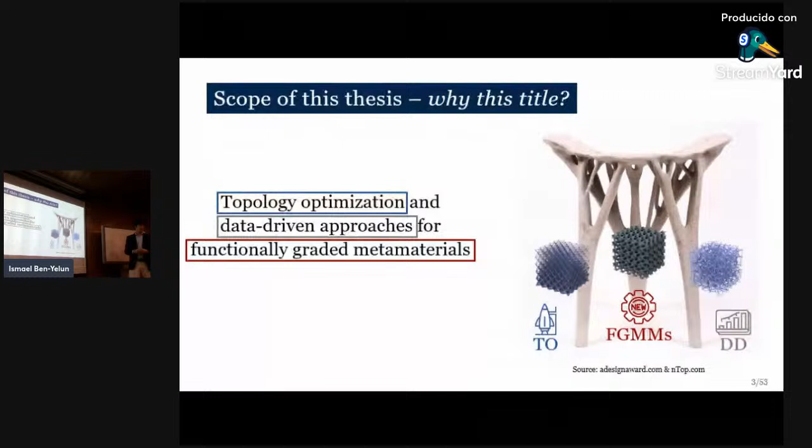So in this context, the metamaterials began, and they are defined as microarchitected materials that can exhibit unique properties compared to the bulk materials that they are made of. On top of that, they can be functionally graded, which means that their equivalent properties can vary across the domain.

Now let's give a quick example of each of the topics. So let's say that for topology optimization we have this domain omega with these boundary conditions. If we run a minimum compliance optimization algorithm, this is the cantilever beam that we would achieve.

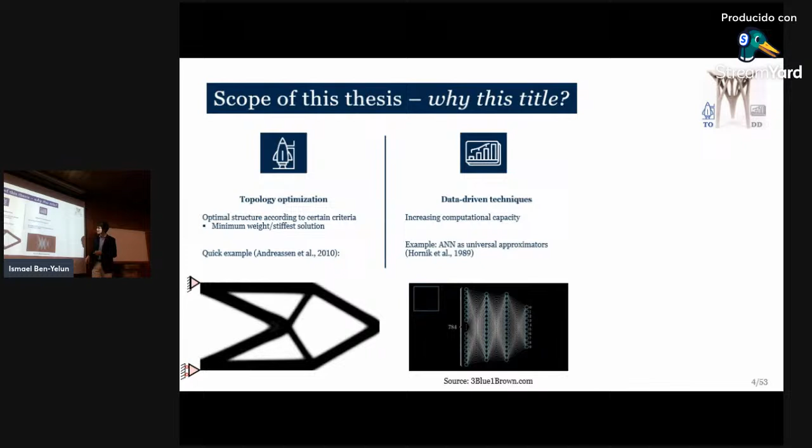In terms of data-driven techniques, an example that I like is the image recognition by artificial neural networks. This model can learn from data, in this case handwritten digits, and can identify this image over here as a nine, replicating the phenomena that is happening in our eye.

And lastly, as I was saying that metamaterials can exhibit unique properties, one of those properties is the ability of being auxetic, which means having a negative Poisson's ratio.

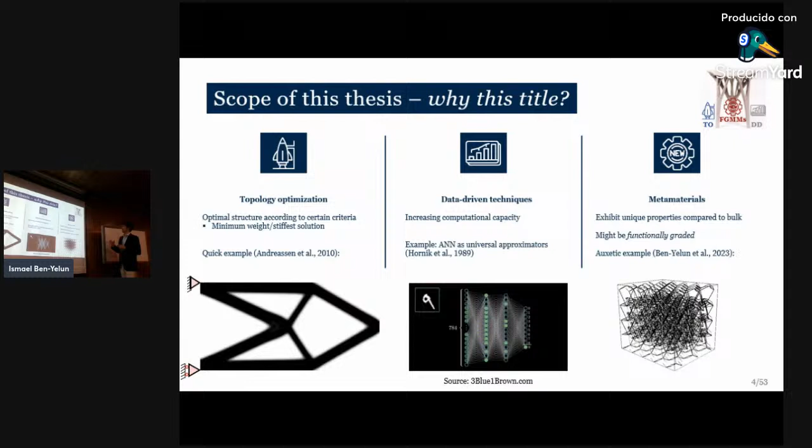Now let's review in a little bit more detail each of the topics and the state of the art, starting with topology optimization.

As a mathematical optimization problem, we will minimize an objective function, for instance the compliance of a structure, subject to some constraints: the linearized equilibrium equation, and other constraints like volume in compliance minimization problems.

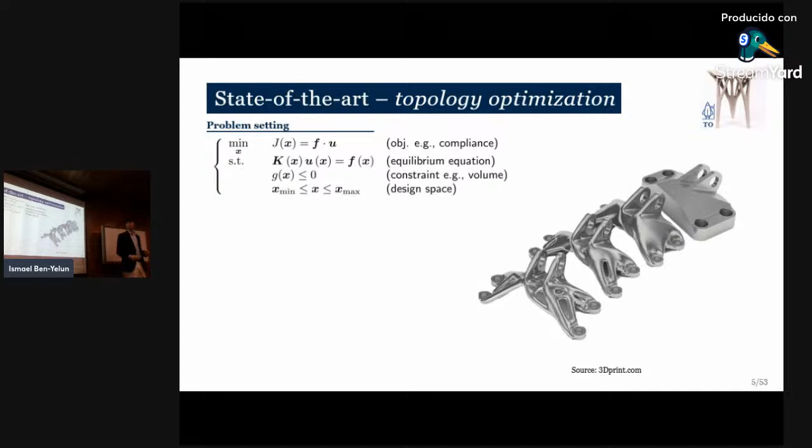We will typically consider linear elastic isotropic materials, and on top of that, penalization techniques, meaning assuming an exponential law relating the density of an element and its stiffness. This is assumed in the Solid Isotropic Material with Penalization scheme, SIMP, one of the most famous topology optimization algorithms, which is gradient-based.

But there are other techniques, like ESO, that don't require the computation of sensitivities, and they are simpler in that sense. This idea of being evolutionary or hard-kill will be exploited in the second part of this defense.

Sigmund and Maute highlighted in a review paper ten years ago some of the challenges topology optimization has to face. For instance, the ability to deal with multi-scale problems, and hence computationally expensive problems.

And also the ability to deal with complex boundary conditions, mixing force and displacement impositions.

But on top of that, we identified that these algorithms are typically targeted at global requirements, for instance the global compliance of a structure. And we are missing the opportunity of targeting local objectives, implementing functionally graded metamaterials.

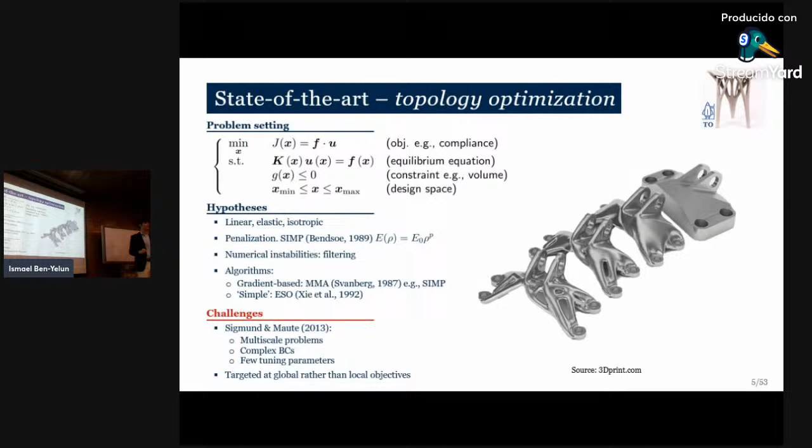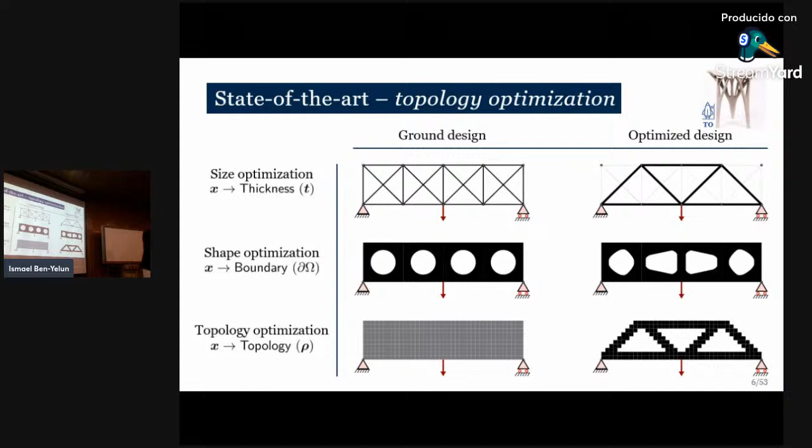By the way, I'm continuously talking about topology optimization, but let's frame it within structural optimization. So basically we have size optimization, in which the thickness of the members of our structure is the design space. In shape optimization, the boundary of that domain is going to be our optimization variable. And lastly, in topology optimization, every element of my finite element discretized mesh is going to be an optimization variable.

Now let's move to the data-driven techniques. As I was mentioning, there are plenty of data available in order to build our surrogate models that can bypass expensive evaluations. In our case, the data from which these models will learn is going to come from either simulation or experiments.

So far, when we are solving a part or a component in our computer, we are building a so-called virtual twin of reality that takes into account the physics. If instead of that we fit, say, an artificial neural network with data coming from simulation, we would build a digital twin.

So the concept of hybrid twin, mixing both realities, has appeared recently, in which we are building less complex models of the reality, and hence more efficient, but also considering the physics.

There are plenty of algorithms available in these techniques, from classical machine learning algorithms to deep learning algorithms, for example this artificial neural network. For computational mechanics approaches, I highlight this review paper. Some of the cases are continuum-based, like WYPiWYG, or physics- and structure-based, like physics-informed neural networks.

These sometimes black box models have to be explainable or interpretable, because we have to implement them in a regulated framework as engineers. For instance, in the aerospace industry, we should certify every single method, software, or tool before including it in an actual aircraft.

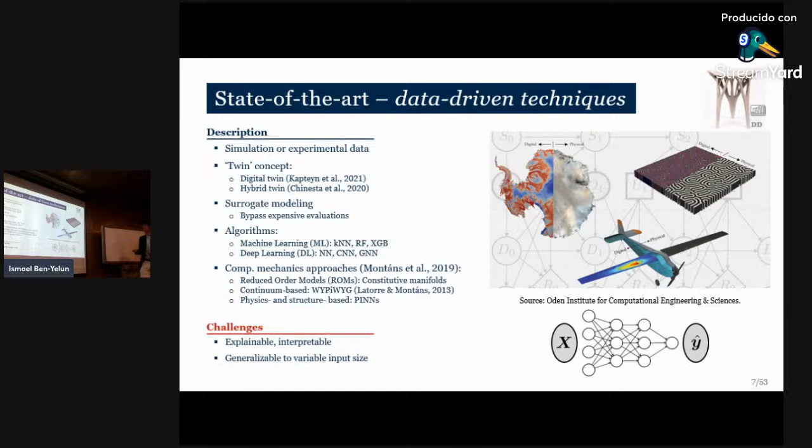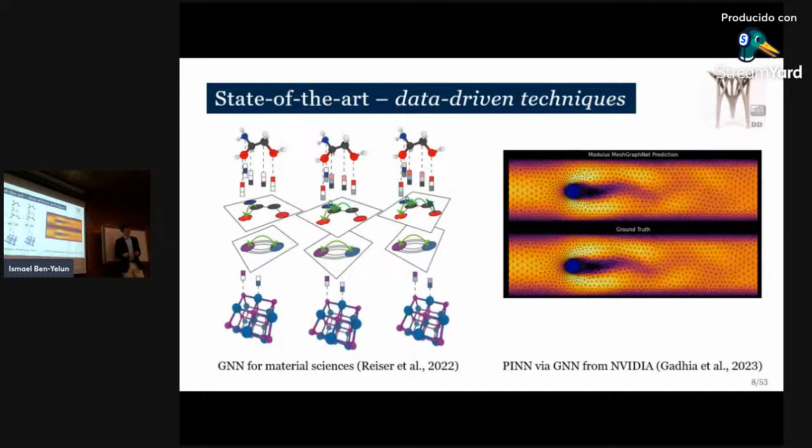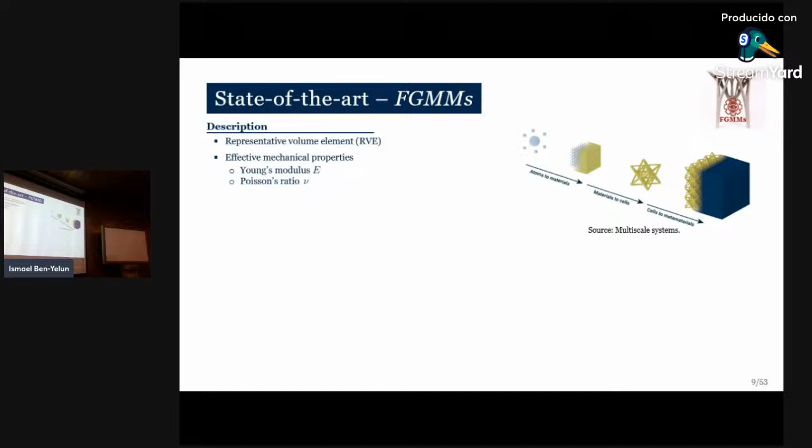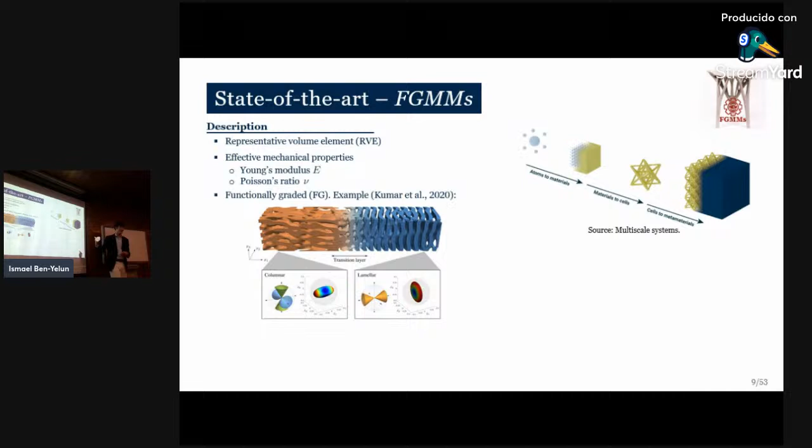Since this problem comprises several scales, it's a hierarchical problem, the multi-scale problem arises, and it is expensive. Sometimes it is solved via FE-squared approaches, which are computationally expensive, as I was mentioning.

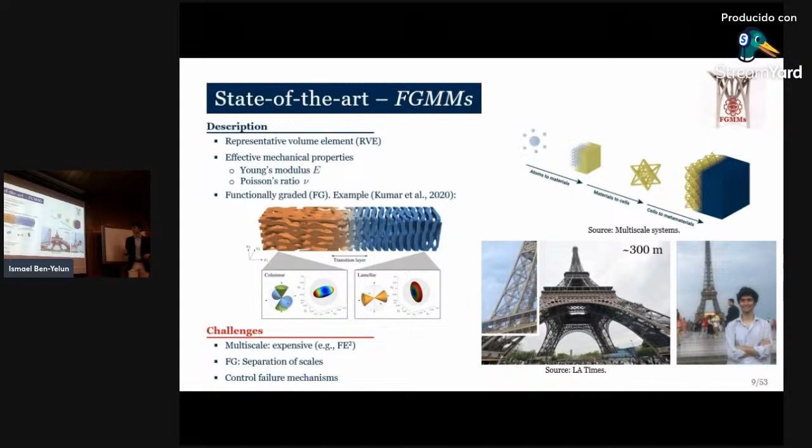Now that we have reviewed in detail all the topics that I will cover during my PhD, we have identified some of the key points that motivated our study.

We know in the literature that there are a lot of topology optimization algorithms, even for multiscale structural optimization processes. In some cases, they are targeted at local requirements, like local stiffness, or local stress constraints. But when we take a look at the macro-scale problem, we always see that they are targeted at global requirements, for instance, the global compliance.

So we identified that novel topology optimization algorithms for functionally graded metamaterials, targeting local behavior directly in the macro scale, are needed. In the literature, we can also find data-driven surrogates in order to be more efficient in the micro scale.

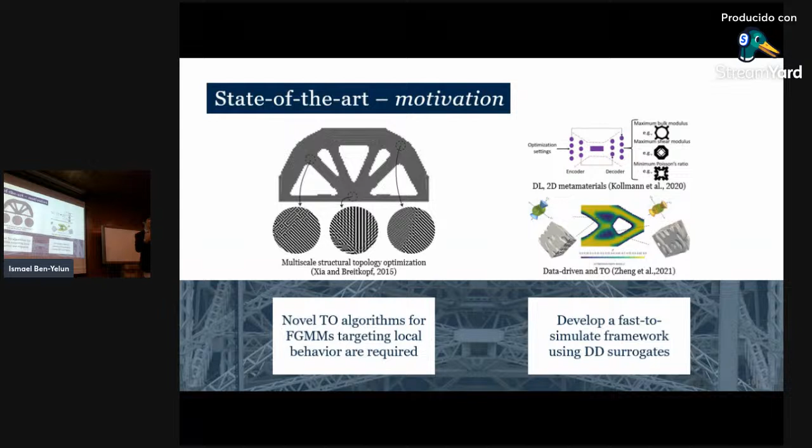But again, if we take a look at this kind of algorithms, recent papers, recent publications, we will see that the objective function is, as I was saying, a global variable, and not a local one. So considering this, let's put the methodology in a concept map.

We want to develop topology optimization algorithms that obtain functionally graded solutions, like this one, because this is a Young's moduli distribution. And we want to generate metamaterials that can behave as these solutions yielded by the topology optimization algorithms. But this is an inverse problem, and hence it is ill-posed.

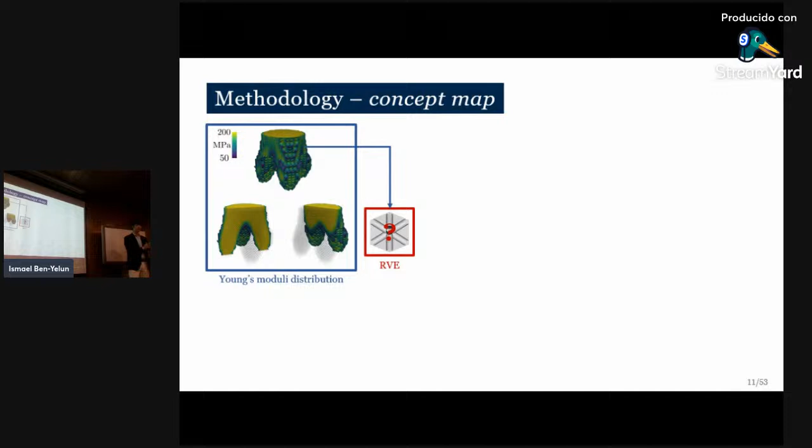There are plenty of configurations that can behave similarly in the macroscale. Therefore, we followed two approaches. The first one, an experimental one.

Taking this unit cell and assuming an exponential, square exponential law, we can actually build metamaterials out of a Young's moduli distribution. And we can actually print those components in 3D printers, like this chair. So this would be a mechanical point of view of solving this challenge.

But as I was saying, we can take advantage of data-driven surrogates. So in order to do so, we're going to first build a machine learning model able to compute effective properties in metamaterials with fixed topology unit cells. Then we will go one step further, building graph neural network surrogates in order to compute these effective properties.

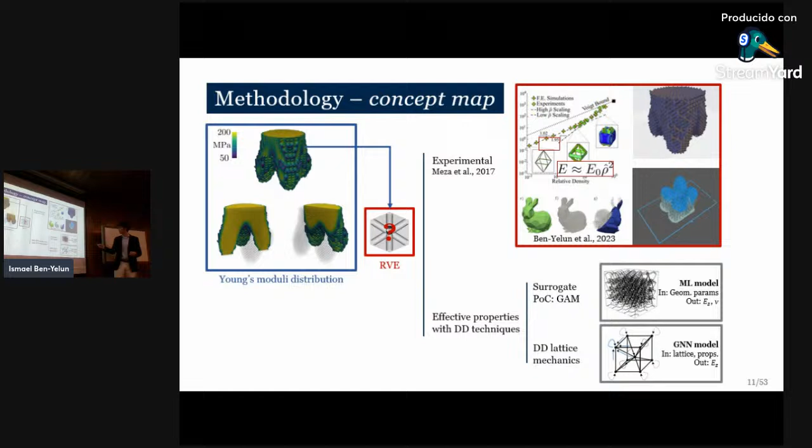With that, we will have a large data set containing different lattices, and then we could perform a first step towards inverse modeling, because we can request a specific Young's modulus of this element, for instance, and then suggest the corresponding unit cell.

This comes with some limitations. For instance, I'm talking about printability. That is the reason why I will also focus on robust topology optimization techniques addressing uncertainties. And these machine learning surrogates are limited to linear elasticity.

That is the reason why in the last part of the presentation, I will present a machine learning surrogate accounting for nonlinear effects, like fatigue damage in composites.

Having said all the methodology, we can establish the objectives of this research, which are to propose novel topology optimization algorithms targeted at local requirements for functionally graded metamaterials, to build machine learning surrogates able to compute effective mechanical properties in lattice materials, with the aim of joining both previous objectives together to address multi-scale structural optimization problems.

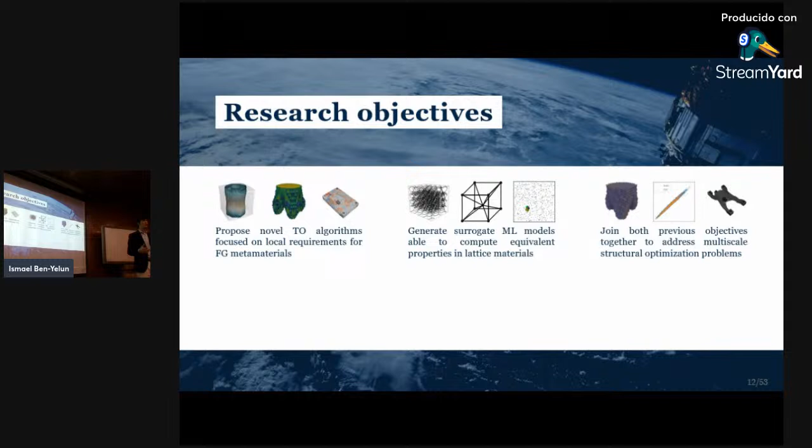Or in a more general way, we want to provide computational methods and tools for structural analysis and optimization of functionally graded metamaterials, ultimately being able to obtain a fast and physics-based framework suitable for computational mechanics in general.

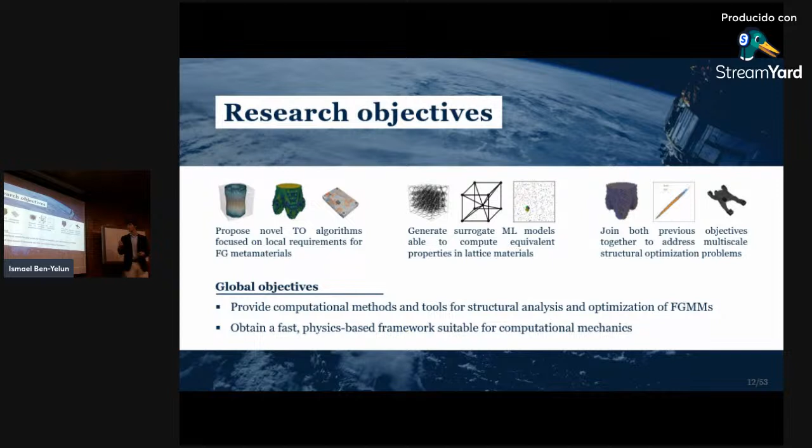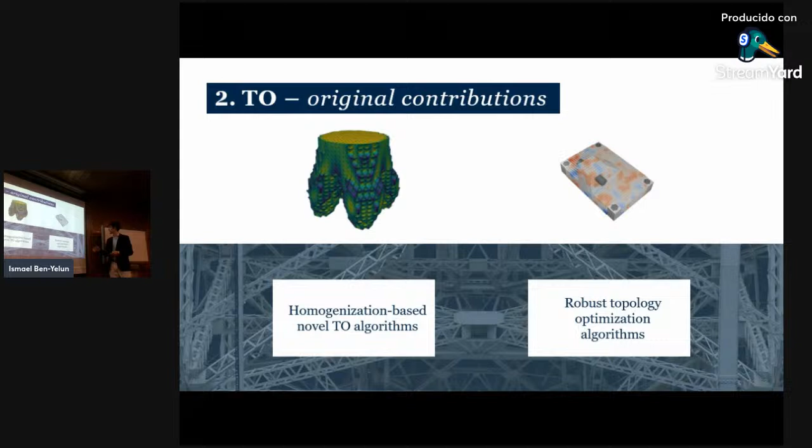Now we will move to the second part of the presentation, in which I will present topology optimization algorithms. I will present two original contributions: the first related to novel topology optimization algorithms targeted at local requirements, and a second for robust implementations accounting for uncertainties. Let's start with the first one.

That local targeting is going to be achieved through homogenization of mechanical variables. The problem we are going to set is the minimization of the standard deviation of a mechanical variable h, yet to be defined. We will discretize our domain and define one h per element and subject this problem to the linearized equilibrium equation.

We will impose directly the boundaries on the Young's modulus, on the material properties. These are the expressions of the variance, the standard deviation squared, and the average value of this mechanical variable across the domain. As I was saying, h could be any mechanical variable.

We will see a strain homogenization algorithm and a stress homogenization algorithm, but it could be any other, like for instance the strength of a material. Lastly, this methodology can accept either force and displacement imposition, dealing with the complex boundary conditions challenge highlighted in the review paper.

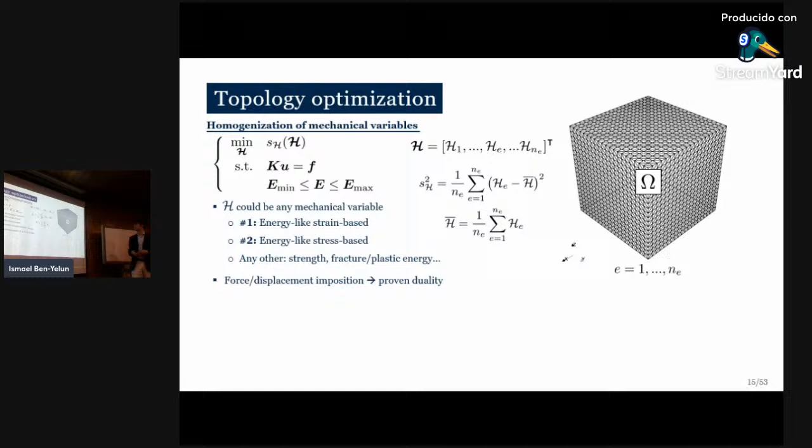As for the optimization process, since Newton-Raphson schemes present problems because of the singularity of the Hessian of the objective function, we will use a gradient descent scheme with an adaptive step eta for searching the minimum.

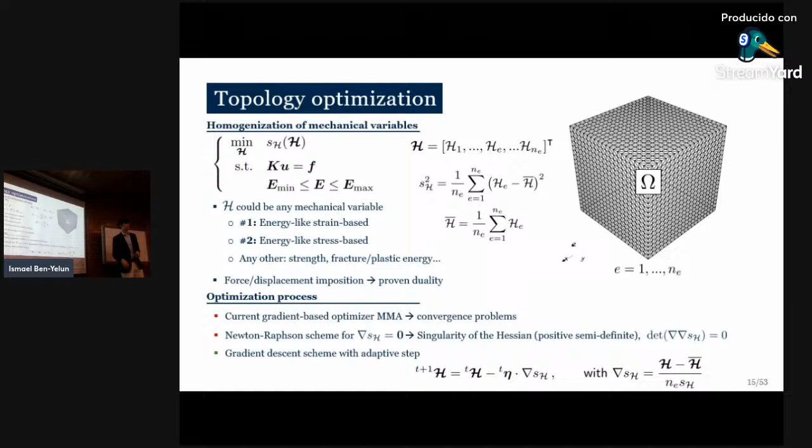Let's start with the strain homogenization problem. We can express the total strain energy of a domain as a sum of the energy contributions of every finite element. Assuming a linear elastic isotropic material and performing numerical integration, we can express the total energy of one element as the multiplication of its Young's modulus, and this energy divided by the Young's modulus, because this d-hat is going to be the stiffness matrix in Voigt notation divided by the Young's modulus.

If we fix the Poisson's ratio, that means this expression is not going to be dependent on the Young's modulus. In other words, we can express the average strain energy density as the multiplication of Young's modulus and this h variable, which is an energy-like variable accounting for strain level, with dimensions as well.

Now let's plug this into the gradient descent definition. After some assumptions, imposing an adaptive step and grouping this variable, we will reach the updated properties model. Basically, we will follow an evolutionary approach in which we will solve the equilibrium, update the properties, and in this new design point, solve the equilibrium again until some convergence in the total strain energy function.

Our objective function is convex because of the positive semi-definiteness of the Hessian, and we will update the material properties following this formula.

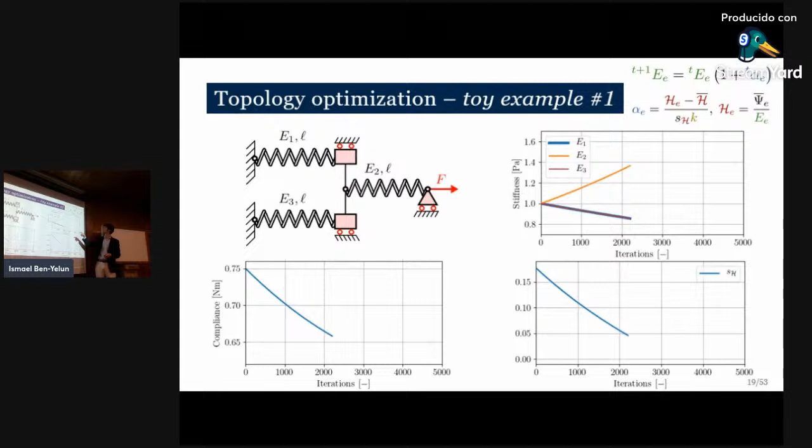Let's see some animations. As I was mentioning, the stiffness of element 2, the orange line, is getting increased up to some point in which we have reached a homogeneous deformation state.

Because we know that when this element has twice the stiffness of these two, the deformation level is going to be the same on both sides, which means the alpha is going to be 0, and we have reached this homogeneous state. We have stabilized the compliance, and we have minimized our objective function.

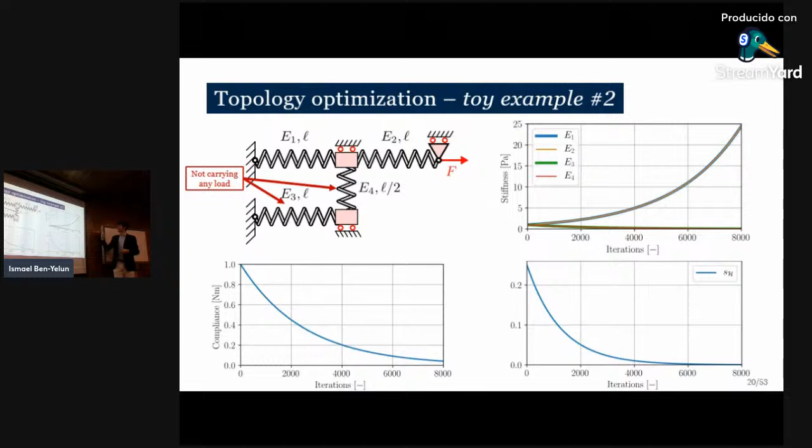But what happens in other cases in which some elements are not carrying any kind of load? In those cases, the homogeneous state is not possible, because there will always be elements with 0 deformation level and elements with non-zero deformation level. Some elements tend to decrease their stiffness, while others tend to increase. This shows there is a need for limits in our algorithms, lower limits and upper limits.

So those elements presenting a stiffness below a certain threshold will be removed, as in a hard-kill evolutionary scheme. And the other way around, we will impose some maximum stiffness level to put limitations. So elements reaching either their upper or lower level will be removed or will no longer be updated in our scheme, and the homogenization will be pursued in the rest of the active elements.

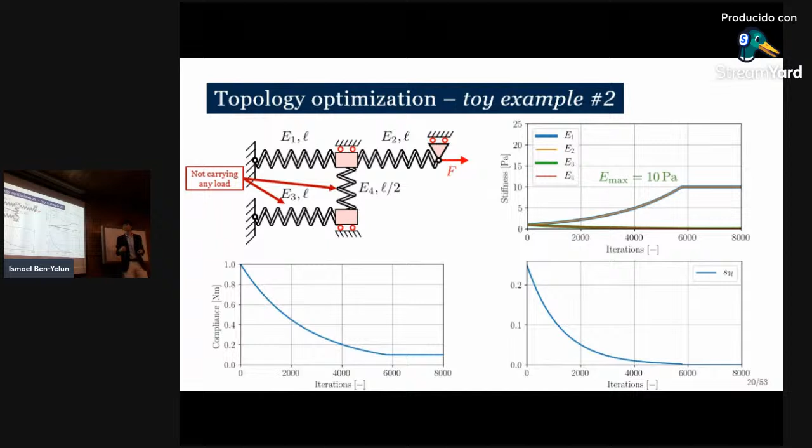Now let's take a look at some numerical examples. I will start with a cantilever beam in plane stress with quadrilateral finite elements, and 3D cases with tetrahedral elements with one integration point.

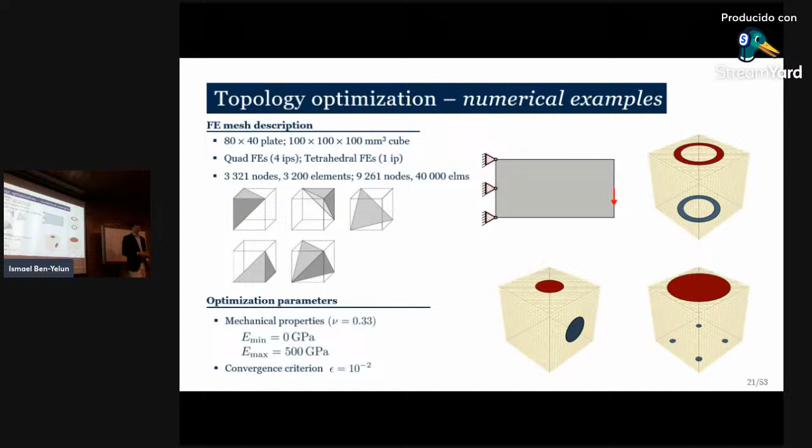Starting with the first one, this is the ground structure, and our approach yields this functionally graded solution. If we compare it to an unpenalized version of SIMP, we can observe that we achieve a quite similar solution. This is interesting because we are pursuing different objectives: in our case we are homogenizing the strength level, whereas in SIMP they are minimizing the compliance, and yet we achieve the same results.

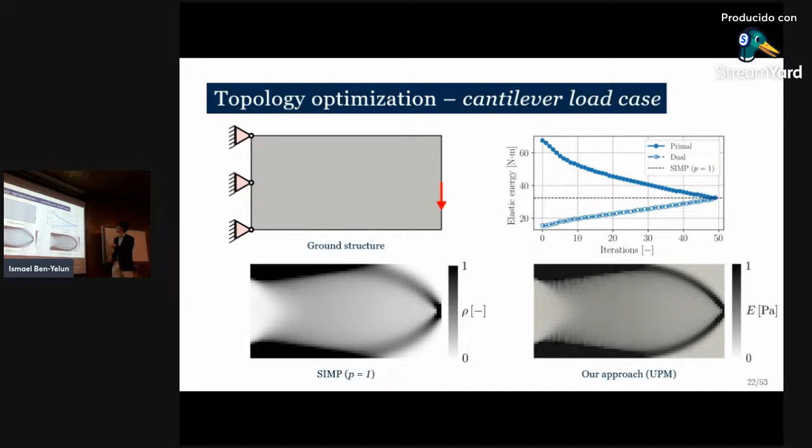This other curve, shown with a dashed blue line, represents the dual solution, meaning solving this problem but imposing the equivalent displacement instead of load. As I was saying, we can reach the same solution because we are in the linear region.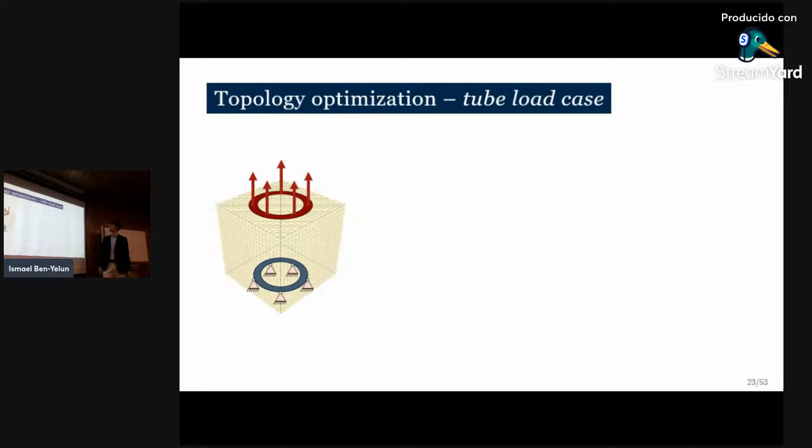Let's go for the 3D examples. We have this domain over here. We will restrict the displacements at the bottom face nodes, and we will impose a vertical load at the top face nodes. If we run the algorithm, this is the solution we get: a homogeneous deformation.

This is a solution in Young's modulus. Note how those elements close to the boundary conditions reach their maximum stiffness level first. And if we compute the optimization curves, we obtain something similar to the previous case.

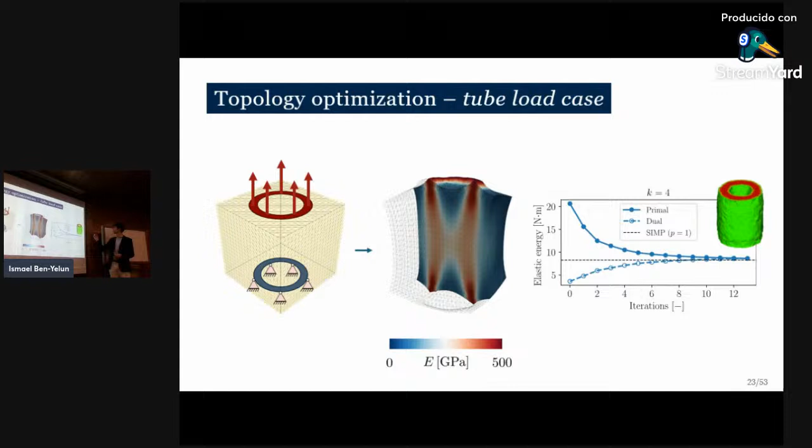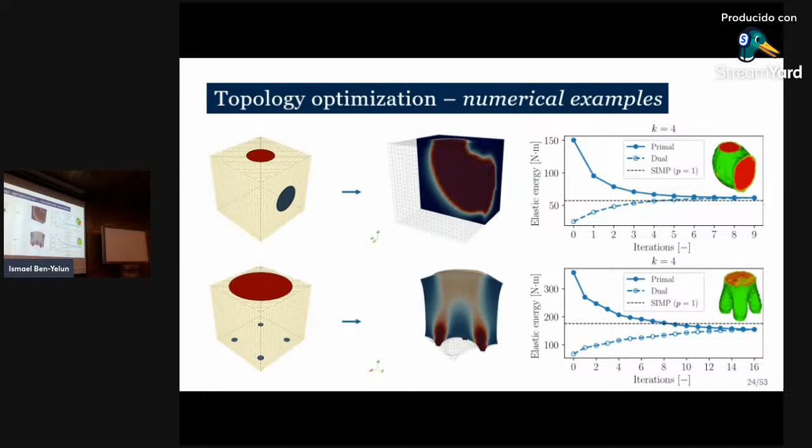This is a validated example using finite element software running SIMP and not penalizing. Let me show you a couple more examples: here is a shear load case and a chair load case that motivated us to print this kind of component. The same conclusions apply.

So this was a strain homogenization implementation. Now let's go for stress homogenization. We can define a new variable h, but in terms of the complementary strain energy function. Following the same minimization approach, we reach this formula, which is similar but works the other way around: elements presenting a higher stress level than the average will have their stiffness decreased.

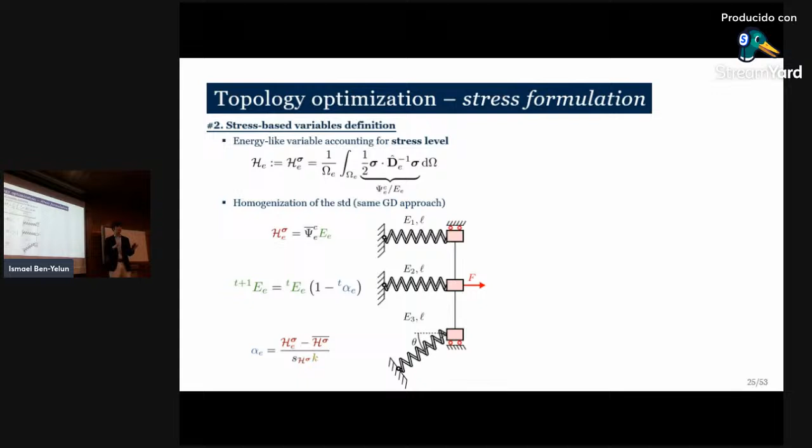Let's have a look at how both implementations work in another toy example with 3 springs. We know that if we run a strain homogenization, elements carrying less load, in this case the tilted green one, will tend to be removed. But if we run a stress homogenization, it works the other way around: it will increase the stiffness of this element up to some homogeneous state in stress, so every element has the same stress level.

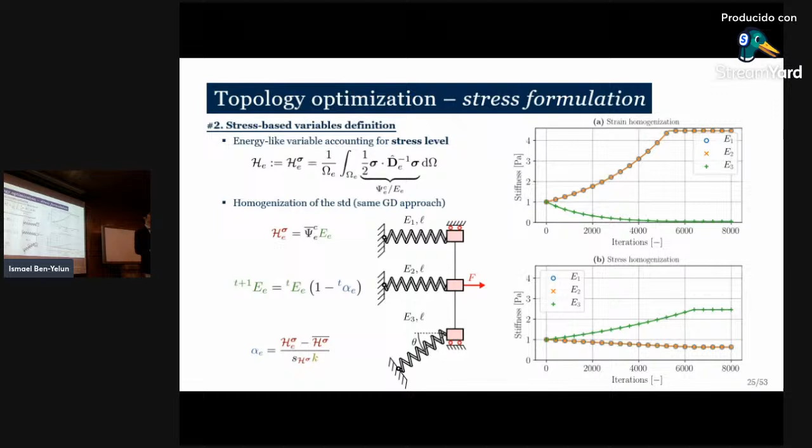So we can say that whereas strain homogenization algorithms seek to remove all those elements that are not working, stress homogenization puts all elements to work so that all elements share the stress level.

Orthotropic extensions might be possible in these algorithms by performing a volumetric-deviatoric decomposition on the complementary strain energy function. Taking into account that an orthotropic material has 9 elastic constants and fixing 3 Poisson's ratios, that leads us to 3 longitudinal moduli and 3 shear moduli. So we will perform an update of the 6 elastic material properties at the same time, in some kind of multi-objective optimization problem.

So if we run a strain homogenization algorithm on the chair example, for instance, we will reach more optimal solutions thanks to the wider design space that we are considering.

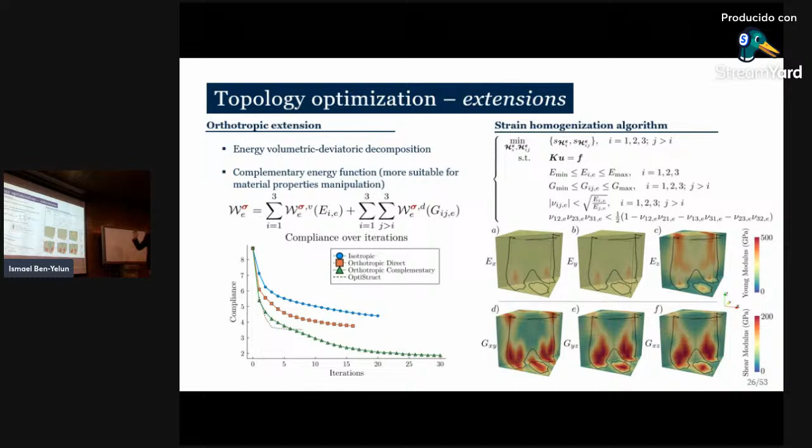So with that, that was the end of the novel topology optimization algorithm that I wanted to present.

Now let's move to robust implementations. We will apply this kind of robust implementation in lattice structures, like this one over here. We will perform robust designs on lattice structures and consider some uncertainty. In our case, we will consider material uncertainty in terms of Young's modulus.

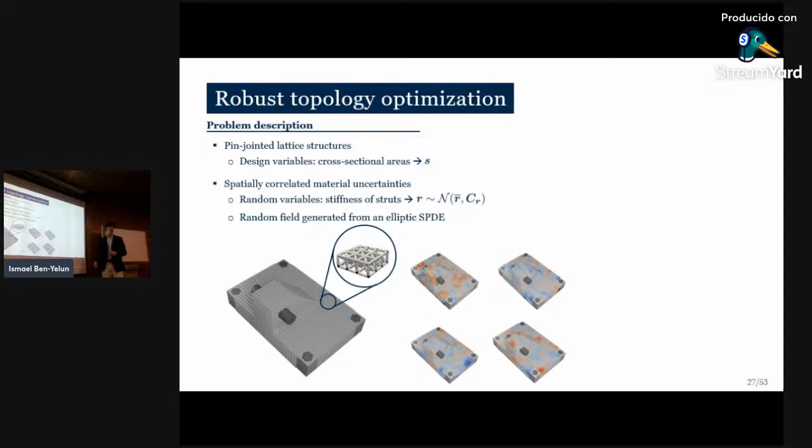So the Young's moduli vector, R, is going to be sampled from a random field with a mean value, R bar, and a covariance matrix. And we state that those uncertainties are spatially correlated. So every time I sample from that random field, I will obtain a different stiffness distribution.

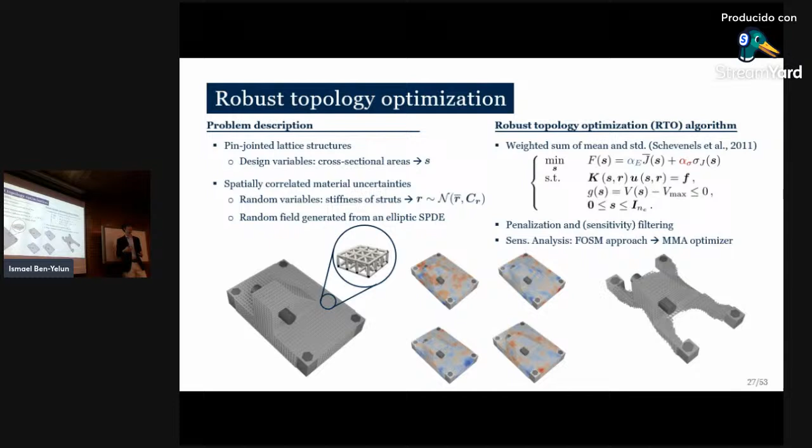The idea of robust implementations is not only obtaining the minimum compliance solution, but also the least sensitive to uncertain parameters. That is obtained by changing the objective function with a weighted sum of the mean compliance and the standard deviation of the compliance across all the different samples one can obtain from a random field. We will use penalization and sensitivity filtering, and the objective function and sensitivity analysis will be performed through a first-order second moment approach, achieving this kind of solutions.

We validated our implementation in this verification example from a paper from 10 years ago. And if we run this optimization, but only the deterministic part, meaning only considering the mean compliance, we achieve this solution. This is the stiffest solution with this maximum volume.

In the other case, only considering sigma j, the standard deviation of the compliance, we obtain a different solution. Note how the material is placed in a more spread fashion in this case, in order to address those uncertainties, which effectively achieves a reduction in the standard deviation of the compliance.

This example was run with a diagonal covariance matrix, which means every single element has a stiffness with its own standard deviation, but it's uncorrelated from the rest of the elements. But how can we compute the spatially correlated uncertainties?

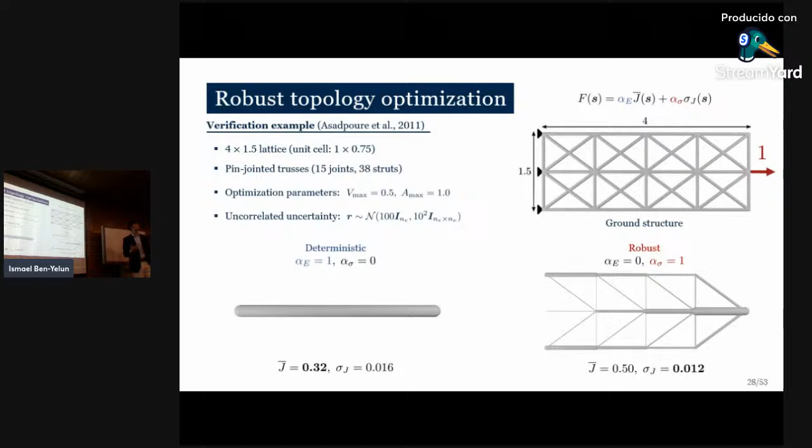Well, I would like to introduce this 3D printing case, which is extrusion-based. Now let's think that we have, in this kind of process, a sudden rise in temperature in the nozzle, which is placed in the material. That sudden rise will imply a defect on the material.

And if we say that that sudden rise lasts for 5 seconds, those elements printed across that time frame will present a discrepancy and uncertainty related to their Young's modulus. We also know that the physical processes that occur here are heat and mass diffusion processes, which are modeled through elliptic operators, or elliptic partial differential equations.

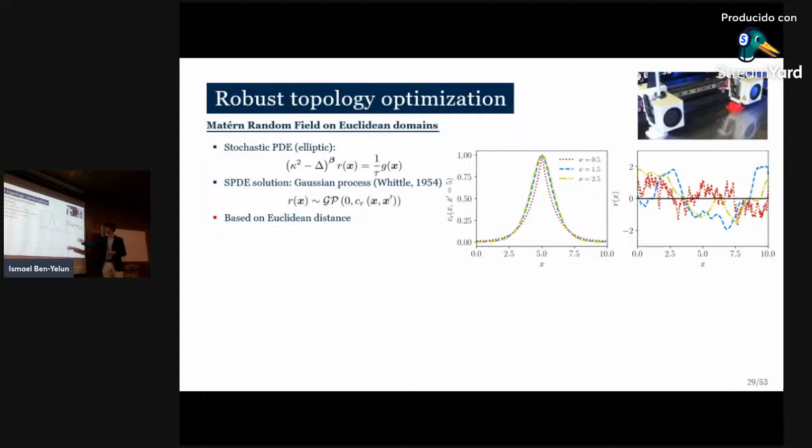So that motivated us to use Matern random fields, which are the solution of stochastic partial differential equations, which are elliptic as well. We know that the Matern covariance function has this formula, but the problem is that it is based on Euclidean distance. So in order to compute Matern random fields on lattices, we will perform a finite element discretization of the previous stochastic PDE.

So we now have this algebraic equation, and if we compute its variance, we will reach the covariance matrix, or even better, the precision matrix, which is the inverse of the covariance matrix. And we proved that this precision matrix is sparse, which is an advantage because it allows us to perform efficient operations with a high number of elements.

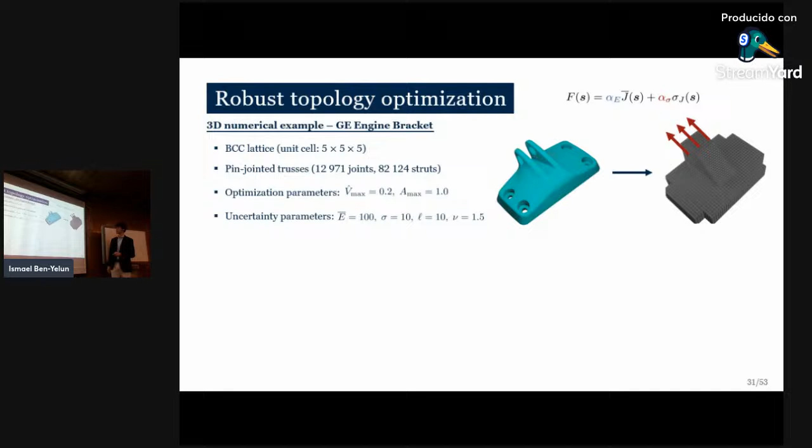Now let's move to numerical examples. We are going to perform the BCC lattice discretization of this General Electric engine bracket. We will use a covariance matrix with a length scale of 10, which means 2 unit cells.

If we compare the deterministic solution with the robust solution, we can observe how the material is more placed here than in the deterministic case. Although the differences in the visual way can be subtle, we can note that by only increasing a little bit the compliance reached, we are almost halving the standard deviation, effectively achieving a robust design.

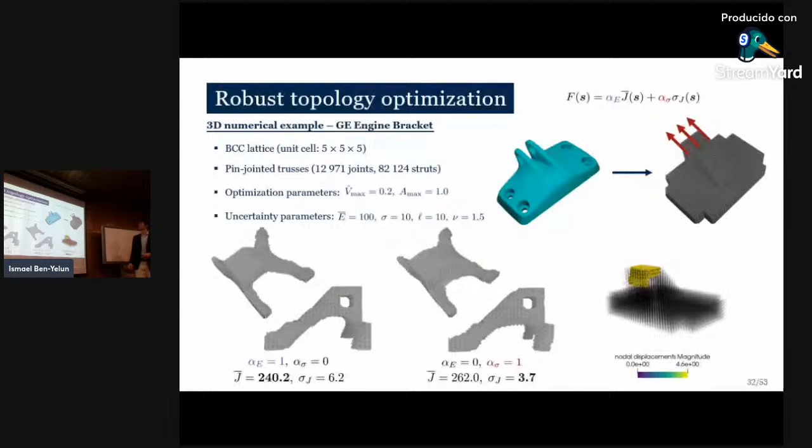So far, we are able to obtain functionally graded solutions, able to deal with uncertainties. But now, let's move to data-driven approaches in order to build data-driven surrogates to compute equivalent properties and obtain this kind of functionally graded solutions yielded by the topology optimization algorithms.

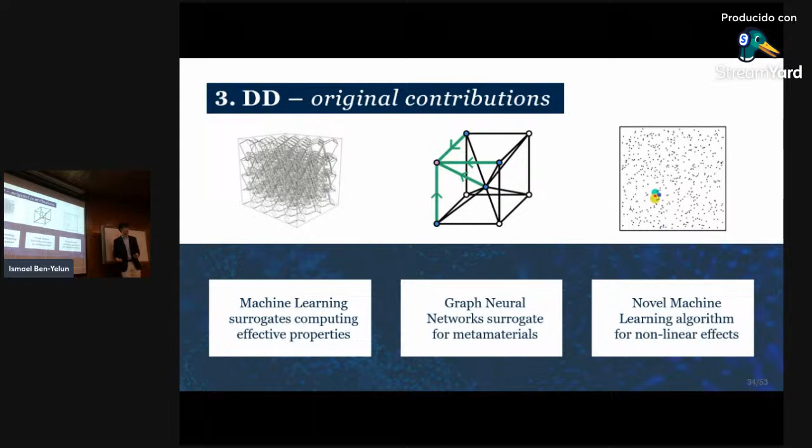So I will present 3 machine learning algorithms. The first one, a surrogate computing effective properties in these lattice materials. A second one, a graph neural network approach. And lastly, a novel machine learning algorithm accounting for nonlinear effects.

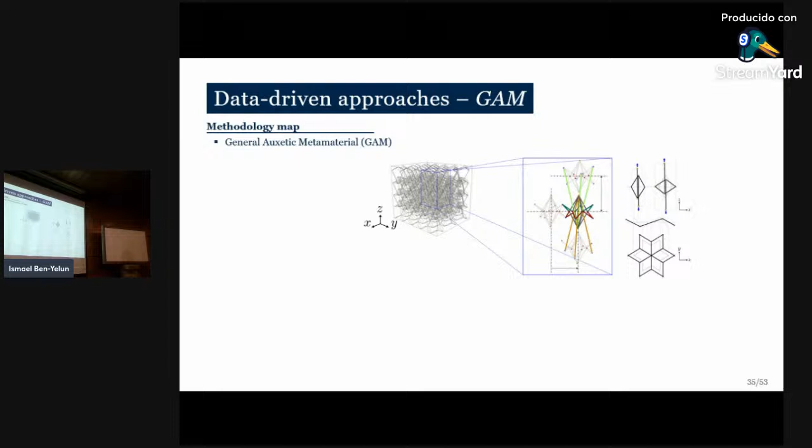Let's start with the first one. Here I present you the GAM, General Auxetic Metamaterial. It's built with unit cells with fixed topology that has been patented, and it can be parameterized with 4 geometrical parameters.

Using a proper mechanical model, we can compute the effective mechanical properties, namely the effective Young's modulus and the effective transverse Poisson's ratio. So the idea is to use both input and output data in order to train a machine learning surrogate model and then predict the effective mechanical values.

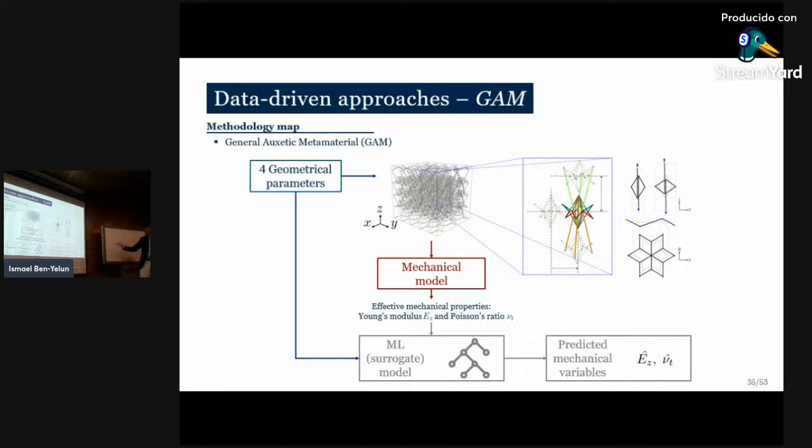Let's start with the RVE definition. So we have this unit cell with 3 geometrical parameters and a 4th geometrical parameter, which is the separation between layers. We will set the number of layers to 5, and then by varying these 4 geometrical parameters, we can obtain different configurations.

For instance, note that if we change this vertical distance of the top and bottom nodes to the mean transverse plane, we can obtain a non-auxetic configuration, and by flipping it, we can obtain an auxetic configuration, because the top and bottom nodes allow, as this image shows, for vertical connectivity between layers.

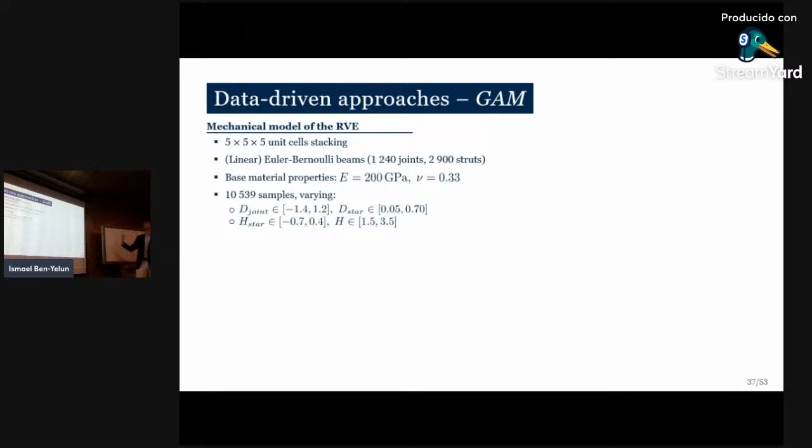The mechanical model that we will use is a linear Euler-Bernoulli beam lattice, and we will generate a dataset of 10,000 samples by varying those 4 geometrical parameters that I was mentioning, obtaining different configurations, for instance the conventional behavior or an auxetic one, the one that I introduced at the beginning of the presentation.

As for the equivalent mechanical properties, we will impose some displacement in the top face nodes, in order to recreate a uniaxial test.

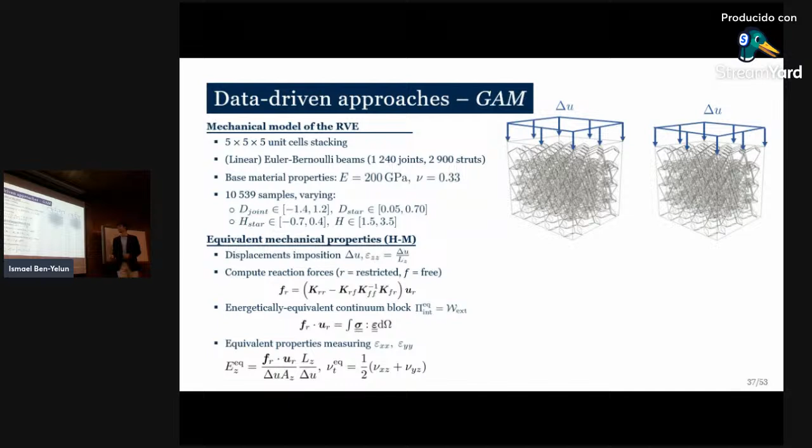We will compute the reaction forces, and based on the Hill-Mandel principle, we will compute an energetically equivalent continuum block. Based on that, we will compute again the effective mechanical properties, the effective Young's modulus and the effective transverse Poisson's ratio, achieving different behaviors.

For instance, in this one, we can achieve an almost 0 Poisson's ratio, because note how the geometrical parameters allow for that, or in this case, an almost -1 Poisson's ratio. They have the same topology, but their geometrical parameters have changed.

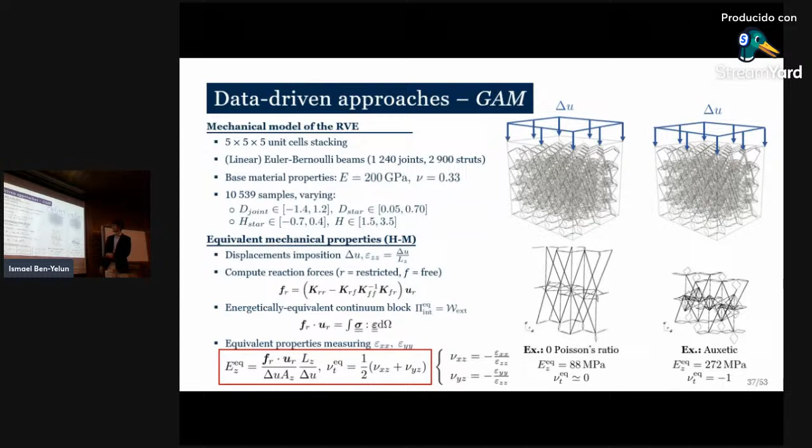So the idea is to build a machine learning surrogate, inputting this data and predicting these mechanical properties. We are performing a random train-test split of our dataset, 80-20, and we will use a classic machine learning approach, such as random forest, averaging 200 estimators.

In order to evaluate our results, we will use the coefficient of determination, the R squared. We note how accurate the predictions are, with a coefficient of determination in the test set of about 0.996. So this is a machine learning surrogate for fixed topology unit cells.

So now let's perform this step further and try to make a graph neural network surrogate to compute various topologies. So we'll start with this unit cube. We'll place some joints on the unit cube.

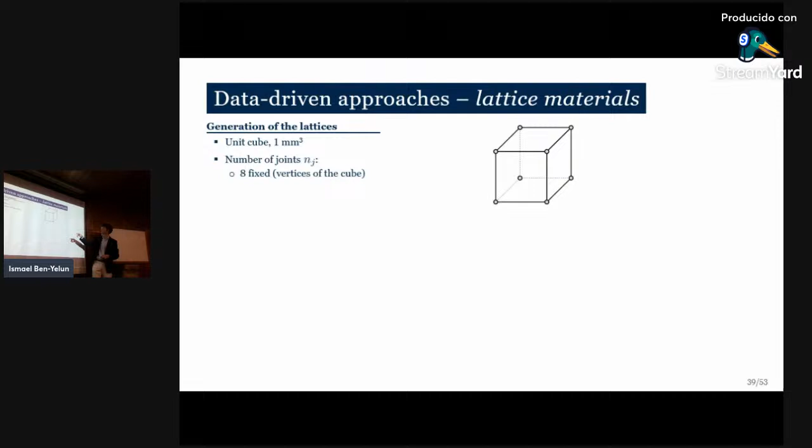Namely, we will fix 8 joints on the vertices, and then we will place a number of nodes from 1 to 50 inside the cube. The coordinates of those nodes will be sampled from a uniform random distribution in order to achieve a random dataset.

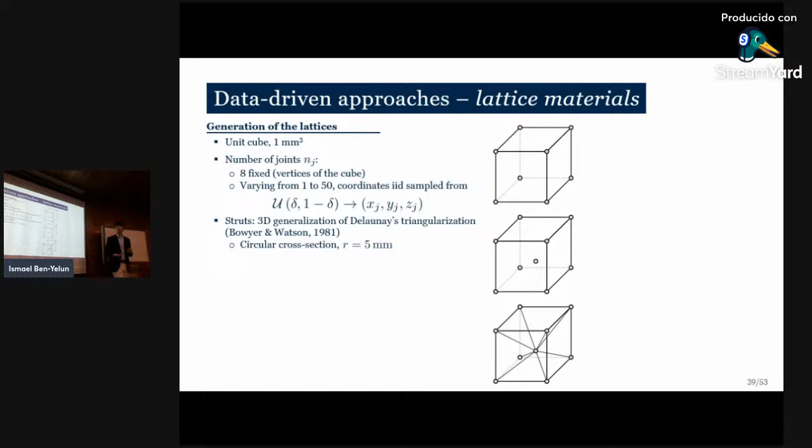In this example, which I'll keep for the next couple of slides, I'll use this simple case with only one node. Then we will connect all the joints to create a lattice structure, and we will consider both a pin-jointed truss lattice mechanical model and an Euler-Bernoulli beam lattice mechanical model, computing the equivalent mechanical properties in a way analogous to the previous case, by imposing a vertical displacement.

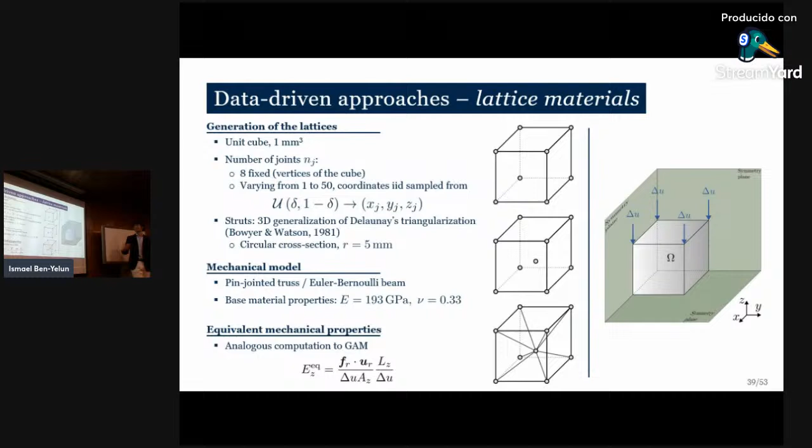Now we are focused only on the vertical equivalent Young's modulus. Our idea is to build a machine learning model that can take these lattices as input and predict the equivalent mechanical property. That's why we went for graph neural networks. We will compute graph neural networks on these kinds of architectures. Let me stop a bit on how graph neural networks work in our case.

We start with this topology. What we do is perform node embedding, using an artificial neural network, the blue one, the same for all the features of the node. We input the coordinates of the node and create the node embeddings for every node separately. The same idea applies to the edges: we input the edge features, for instance the length of the members, the cross-sectional area, and the base material property, and with another artificial neural network we embed the edge features, passing the same architecture discretely for every edge.

Then we take into consideration the connectivity, performing so-called graph updates. This is comprised of two steps. First, a message passing step, where for every edge we consider the start and ending node embeddings and the edge embedding, passing them through a third artificial neural network architecture that updates the node embedding of the ending node. We apply this architecture to every edge in both directions.

Then we perform a convolution. For instance, at this node, several messages have arrived, so we average those messages to compute the updated state of the node. We can perform a number of graph updates, and then perform a pooling operation to obtain the mechanical variable we want to predict.

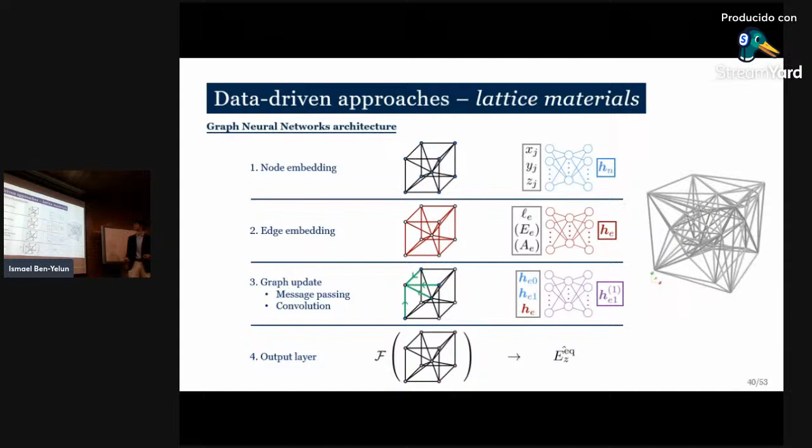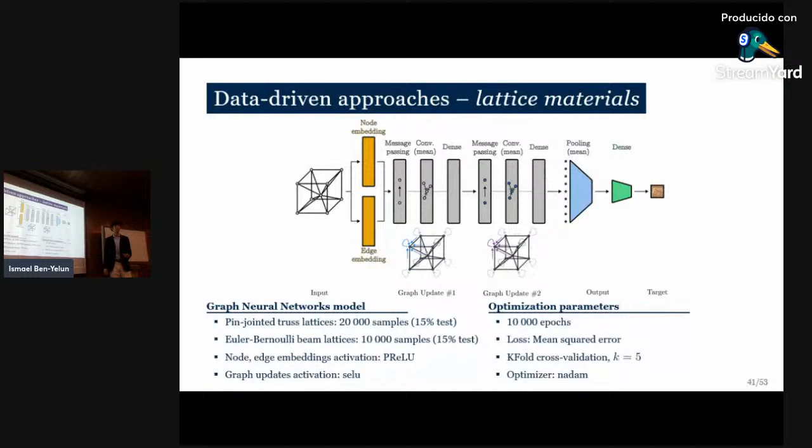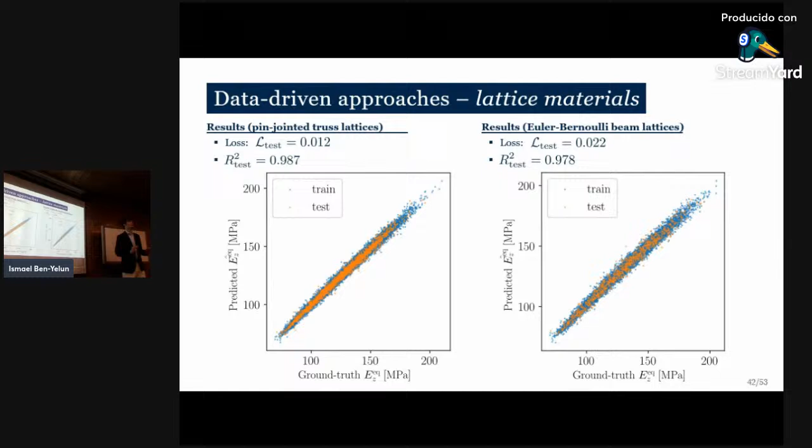In this slide, I show the previous architecture in a graph schematic way. We perform two graph updates, and these are the parameters we use in the graph neural network model. We generate 20,000 samples for the pin-jointed truss lattices and 10,000 samples for the Euler-Bernoulli beam lattices, and here is information about the activation functions. Considering mean square error as the loss, these are the results we obtain for both pin-jointed truss and Euler-Bernoulli beam lattices, with a coefficient of determination on the test set above 0.97.

With that, we have successfully built our graph neural network surrogate. Now we can map a vast number of lattices to their equivalent Young's modulus. By doing so, we only spend 3 seconds on 100,000 lattices, instead of the 100 minutes the mechanical model would take — a ratio of about 1 to 2000.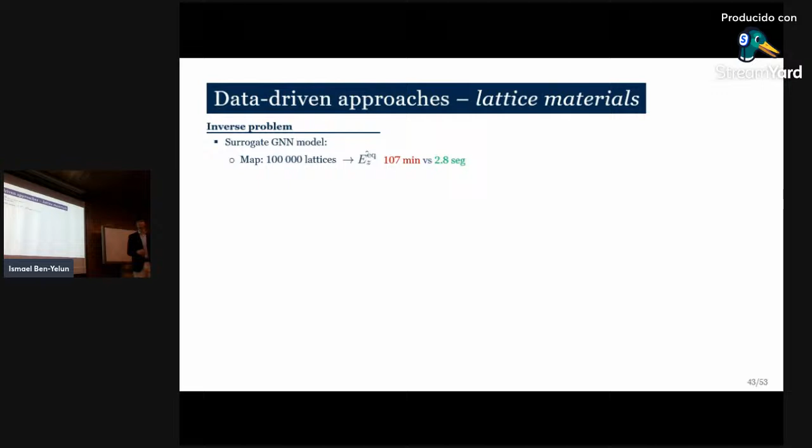We put all the configurations in this plot, considering also the volume, in order to seek the lightest solution. Then we can request, say, a Young's modulus of about 170 megapascals, zoom into that area, and pick the lightest solution.

In this way, we are performing that first step towards inverse modeling that I introduced in the methodology. By the way, in this case, if we compare the actual mechanical model with the surrogate model, our error is less than 1% in Young's modulus, even for a topology the model has never seen before.

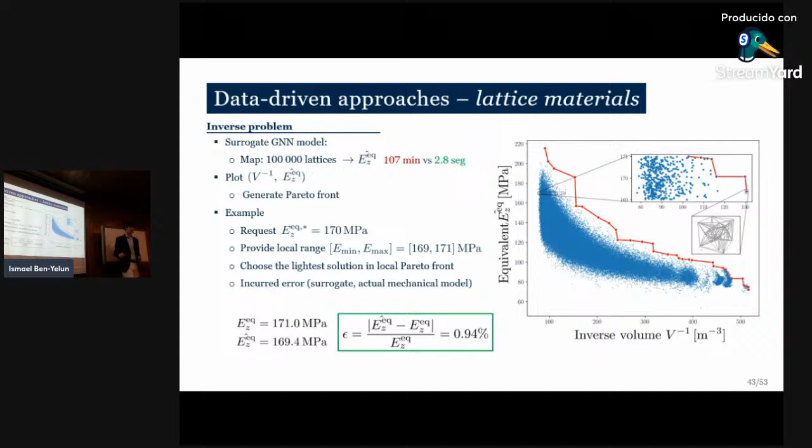The previous two surrogate models were accounting for linear effects. Now let's develop a novel machine learning model in order to take into account nonlinear constitutive effects.

Let me introduce you to the maximum entropy algorithm, which is a nearest neighbors approach. We have our dataset, then a new point with its features comes in, and we perform the convex combination of that new point with the neighbors, then use the same weights in the output space with the same neighbors in order to predict the target.

We are selecting the optimal number of neighbors with a hypersphere of radius h, and that h is computed by the maximization of this Gibbs-type entropy, using a radial basis function, the squared exponential or Gaussian kernel.

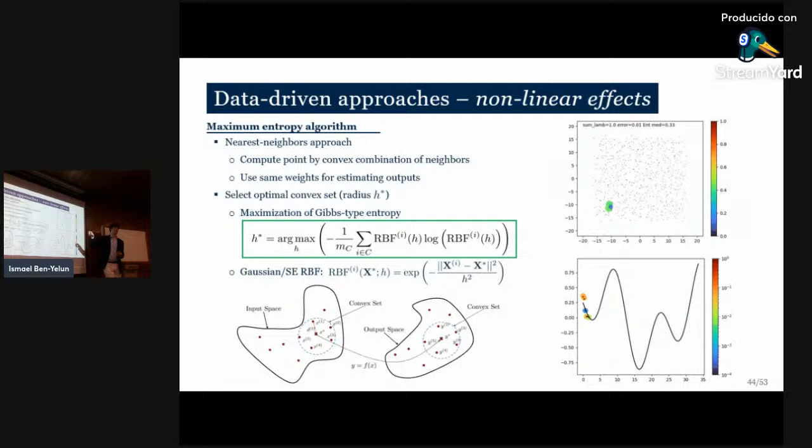In this example, the input features are x1 and x2, and this is the target to predict. Note how this point, traveling along the diagonal, takes a different number of neighbors for every point to predict, so that the entropy they provide to perform this convex combination is maximized.

Now we will use it in some fatigue damage tests, specifically for composites, CFRP composites. This dataset was provided by NASA, and on top of this fatigue damage test, we are performing some measurements with a non-destructive technique, such as Lamb waves.

We take our healthy specimen, do some measurements with the Lamb waves, then put it in the test machine, perform some number of cycles, and then retrieve it every certain number of cycles to perform more measurements. We note how the signal with respect to the healthy specimen is going to change.

Those are the input features for our maximum entropy model. Apart from the constitutive data, such as the ABD matrices of the laminates, we use the ratio between the original signal, the signal in the healthy component, and the signal in the damaged component as input features, and we try to compute the damage, which means the number of cycles remaining up to failure.

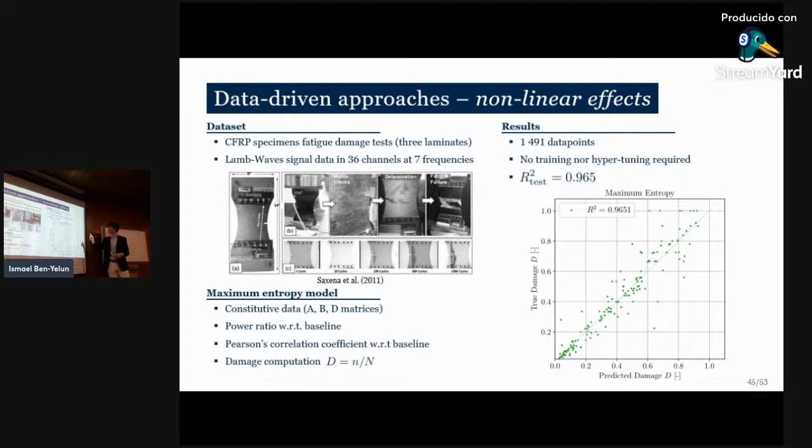With that, in our 1,500 data points, we reach a coefficient of determination in the test set of 0.965, which is accurate compared to other machine learning architectures we are using, such as neural networks, but with the advantage of not requiring training nor hypertuning.

With that, we have finished the third part, and we can move on to the conclusions. Let me first start with the specific conclusions for every single contribution.

We have developed topology optimization algorithms homogenizing mechanical variables. We saw that strain homogenization yields functionally graded solutions similar to those offered by the unpenalized SIMP. Homogenizing stress, we obtain quite opposite behavior compared to strains, which is also an interesting conclusion. And orthotropic extensions were possible, allowing us a wider design space.

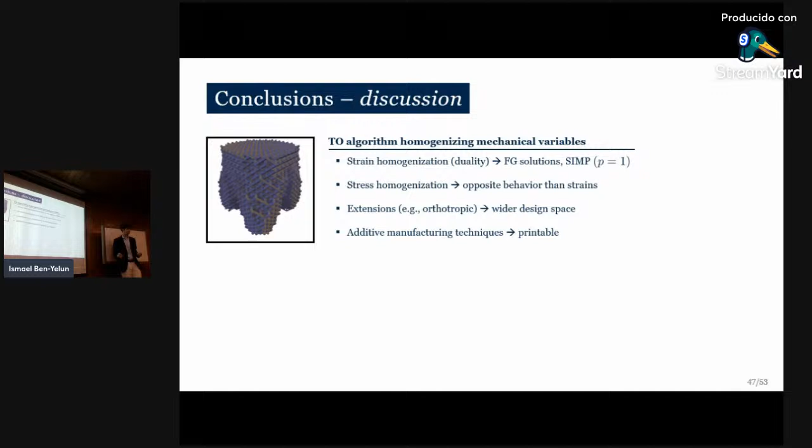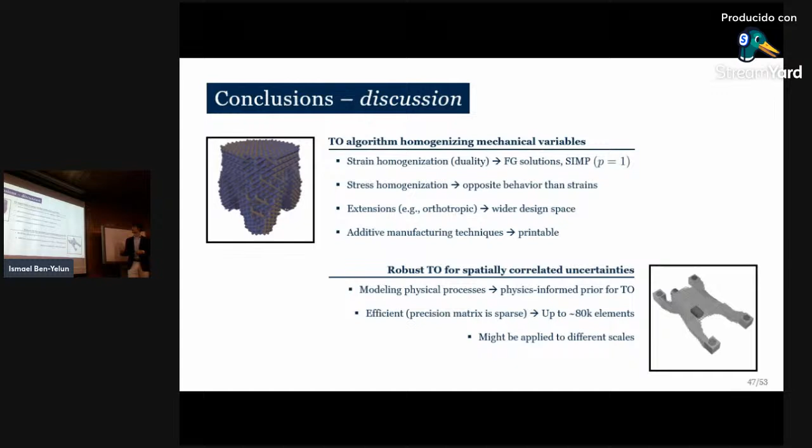Talking about robust implementations, we can model physical processes by providing a physics-informed prior, modeling this covariance matrix that I introduced in the second part. Thanks to the sparsity of the precision matrix, the inverse of the covariance matrix, we can perform efficient operations up to a high number of elements, in this case with 80,000 elements.

As for the data-driven part, we developed a machine learning surrogate able to predict equivalent mechanical properties with fixed topology unit cells, being able to bypass classical methods such as the finite element approach, in which we have to assemble the whole stiffness matrix, invert it, and then compute the reaction forces and so on, obtaining accurate results with a coefficient of determination above 0.996.

Performing this step further, with different topologies, we created a graph neural network surrogate, which had the advantage of being input-size agnostic for lattices with various topologies, obtaining accurate results with a coefficient of determination above 0.98, and enabling an inverse design thanks to the 1 to 2000 ratio that we are gaining with our surrogate.

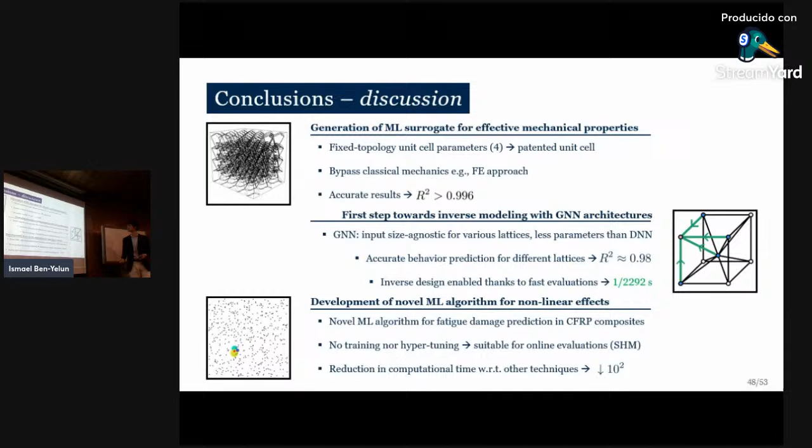Lastly, I presented a novel machine learning algorithm accounting for nonlinear effects for fatigue damage prediction in CFRP composites. Since no training or hypertuning was required, we obtained a reduction in computational time with respect to other techniques of 2 orders of magnitude, which makes this model suitable for online evaluations such as SHM, structural health monitoring.

Since we have some limitations in printability, we developed a robust topology optimization implementation and machine learning surrogates accounting for nonlinear effects, taking into account the linear limitations.

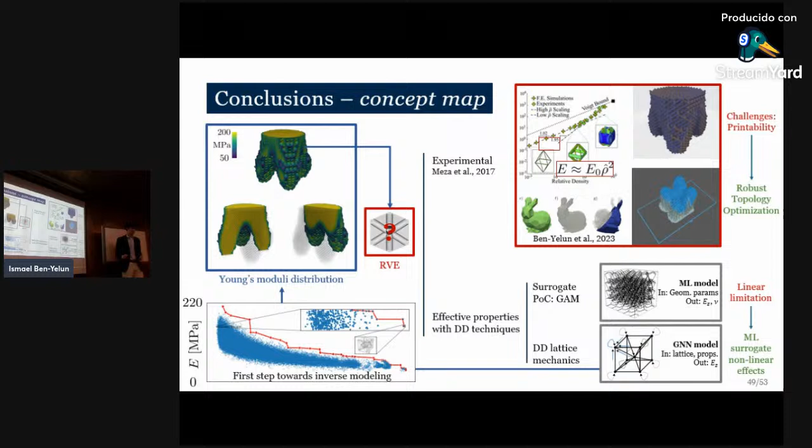But of course, there are more limitations than the ones that I can show you here. That means this work can enable future works. So I will focus on 5 future works that this study may propose.

The first one is to develop topology optimization algorithms that can homogenize other mechanical variables, for instance, dissipative effects like fracture energy or plastic energy.

The second one is the exploitation of energy-based evolutionary topology optimization algorithms in a hard-kill philosophy, by solving the equilibrium, removing some elements according to certain criteria, and then proceeding up to some convergence. There is ongoing research with another PhD student of the group considering plastic effects in this regard.

The third idea is to consider vibrations or dynamic analysis in our topology optimization algorithms. There are current ongoing collaborations of our research group with a national public institution in Spain, and maybe we can apply this to other kinds of metamaterials, like acoustic metamaterials.

The fourth idea could be using the 3D printers that we actually have in order to fit our covariance model, and then use that robust topology optimization algorithm as a kind of second loop optimization of our functionally graded structures.

And lastly, since we performed a first step towards inverse modeling, another way to go is the development of a proper multi-scale framework relying only on graph neural network architectures that can actually suggest a whole metamaterial rather than a unit cell.

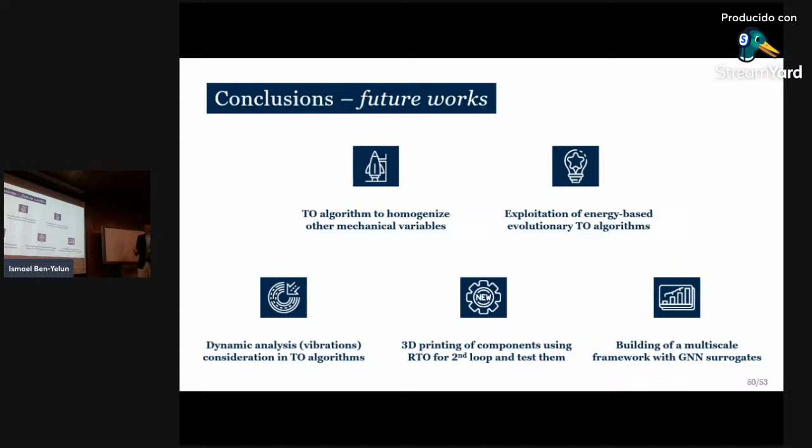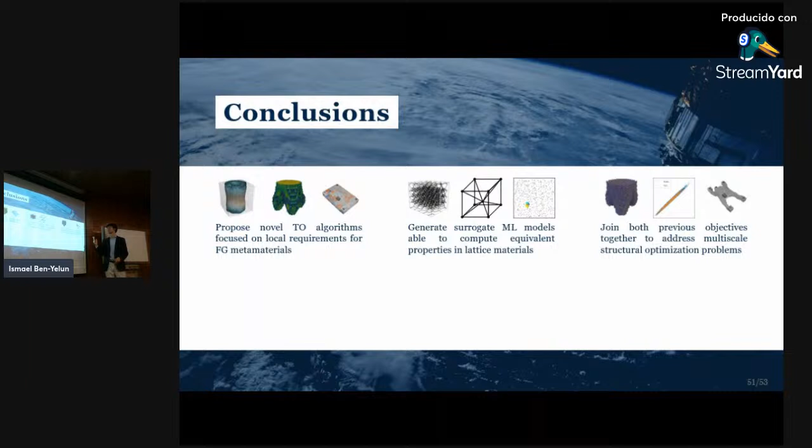As a final conclusion, since those are the initial objectives, we propose novel topology optimization algorithms targeted at local requirements for functionally graded metamaterials, we built machine learning surrogate models for computing effective properties on lattices, and we join these both previous objectives together to perform a first step towards inverse modeling.

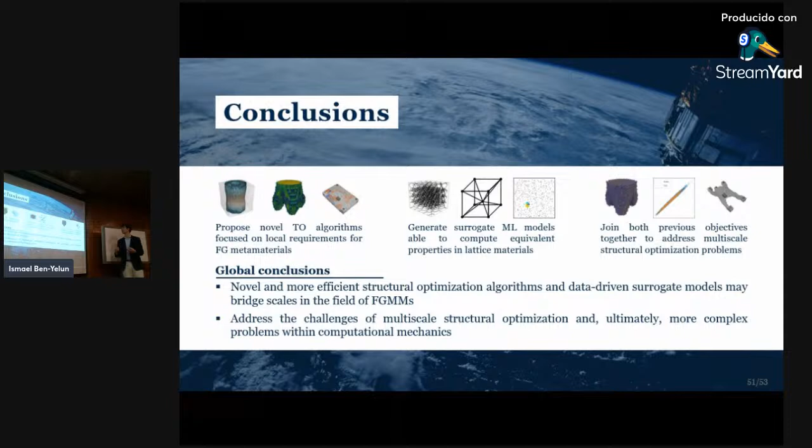We can say that novel and more efficient structural optimization algorithms and data-driven surrogates may bridge scales, or address the challenge of scales, in the field of functionally graded metamaterials. And if we are able to address the challenges of multi-scale structural optimization, we will ultimately be able to deal with more complex problems within computational mechanics.

There is an 8th one, currently under second review in another JCR journal, as are the rest of them. And we have a 9th one currently on arXiv, so we are in the process of searching for the best journal to proceed with submission.

With respect to conferences, I have attended different congresses, like the Congress on Numerical Methods or Computational Plasticity, presenting works on 5 different occasions and giving the conference talk in 2 cases.

So I would like to finish by acknowledging some of the institutions that have made this possible. Thank you very much to Escuela Técnica Superior de Ingeniería Aeronáutica y del Espacio from Universidad Politécnica de Madrid, where I studied my bachelor's degree, my master's degree, and which has allowed me to pursue my PhD.

Thank you very much to my research group, Gamosinos, Group of Advanced Modeling and Simulation of Nonlinear Solids, which I'm a proud member of. I would like to acknowledge the European project COMETAS, aimed at generating a network of early stage researchers, in this case for metamaterials, which has funded my research stays.